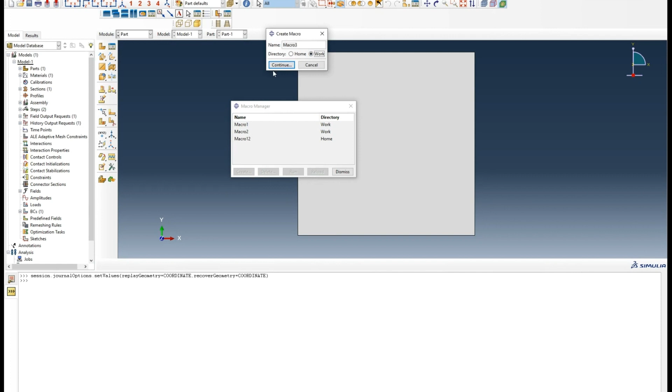So if I go to File, Macro Manager here, I can see that this window pops up. I can go create in my working directory. And this window starts up here. It says record macro, and there's a button to stop recording. So all this is going to do is record the Python commands necessary for me to do any action that I'm doing until I press stop record.

So let's go ahead and define, let's say, a new material. I'm going to go over here, define a density, and I'm going to give it some elastic constants, Poisson's ratio. So I define the material, and let's also create a section. Let's create a solid section with that material. Let's say material number 2. And then I'll stop the recording.

Once I stop the recording, I can go back to my folder structure, and I can look for a file named abaqusMacros.py, which is this file over here. This file will contain all of the macro commands I've written. You see I've written quite a few. The last one is the one I just recorded. So as you can see, it defines the macros in the form of functions. Each of them has some imports that are necessary for this to work. And then there are the commands that essentially correspond to the actions that I did ever since I started recording.

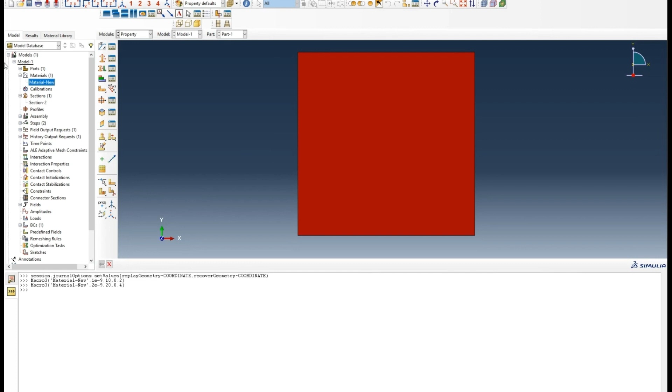But what I want you to keep from that is that Macro Manager is perhaps the most helpful way for you to get only the commands that you need to figure out, how do I get the commands that correspond to this action and this action and this action. So hopefully that makes sense.

You can use this, and as you get more proficient with it, you can start doing more and more actions with each recording and each macro, or you can customize it to specific actions that you want to perform. For example, whenever you open a file, you want to do some definitions every time, you can record those in a macro and just run that macro every time, or you can copy what's in that macro in your script.

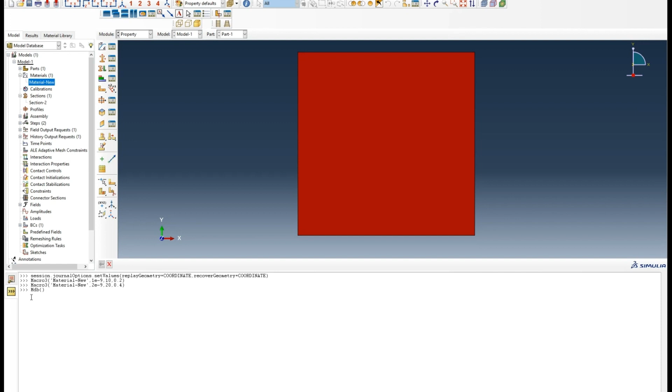So with that out of the way, let's clean up our model database. That's the command I just put here in the window, Mdb with an open parenthesis, cleans up the model database. It's equivalent to me going File, New Model Database with Standard/Explicit Model.

So what I'm going to do next in the remaining 10 minutes, we're not going to have the full time to do this, but what hopefully I'm going to do by showing you here is try to create a structure like this, where scripting will be extremely helpful. This structure is a perforated structure, so you can imagine this is a 2D square with an array of holes that we take a bunch of circles and we perform cuts in our rectangular sheet.

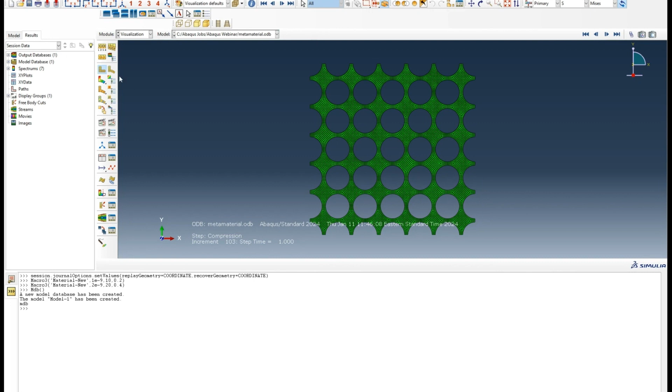And then what's interesting about this is that for certain cases, if we subject this thing to compression, we get a nonlinear buckling style behavior where the holes become ellipses and the orientation kind of alternates, as you can see here. There is a nonlinear force displacement relationship for a structure like this. But what's interesting about this is that this doesn't happen for any number of holes, any size of holes or ligament size.

The behavior of this structure is strongly dependent on how many holes you have, what's the width of those ligaments, how many holes you have in the X and Y direction and stuff like that. So it's an interesting exercise to consider this structure and be able to very quickly modify how many holes I have in the X direction, how many holes I have in the Y direction, run the simulation, set up everything I need to do, my steps, my sets, my boundary conditions, my material assignments, my mesh, everything. I want to be updated.

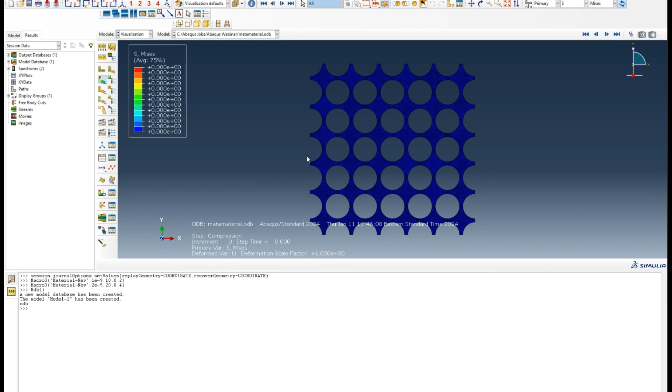I want everything to be updated at the same time, very, very quickly, without having to define the model from scratch. This is where scripting comes in handy. So this is what we're going to try and do right now. So there are many ways that one can go about this. I'm going to show you one, which I think is the easiest.

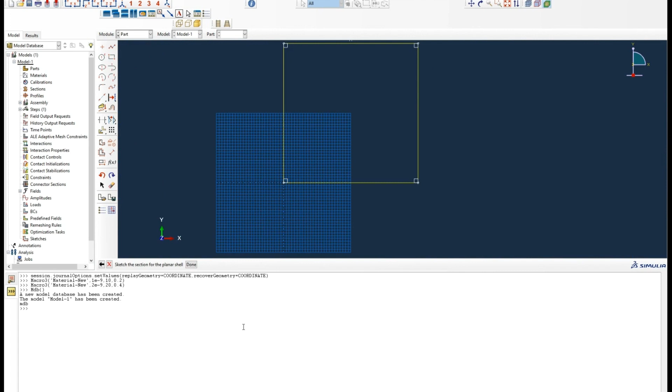I'm going to start with a 2D square over here. So I will do 2D shell, approximate size 1. I'll create a square at 0, 0, and 1, 1. So here's my square. Click done, and then I'll make a circle. Part 2, given that my square is size 1, I'll make my circle slightly smaller. Let's make it like this.

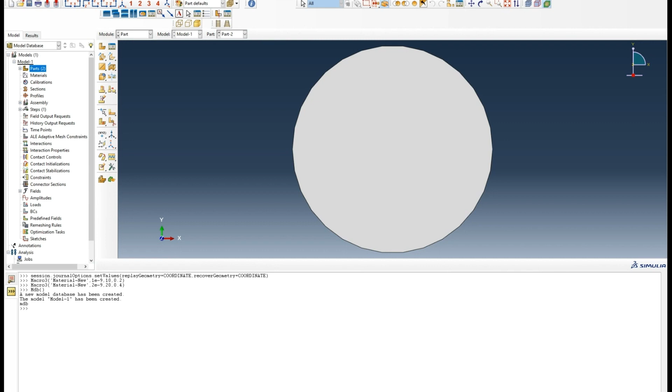And then what I can do is I'll go to the assembly and I'll create an instance of each. As you can see, my circle lies here in the corner. I'll make a couple more circles. I'll make another one and then another one. So I'm not creating new parts because I don't care about having different parts for different circles. I'm just creating different instances of the part. So as you can see, I have 3 circles over here. Let's move those a little bit, shall we?

Let's get the second one. I'll translate it by, let's say, 0.25. That looks good enough. And then I'll also translate this one by 0.25 in the vertical direction. And then what I'm going to do is I'm going to create a cut.

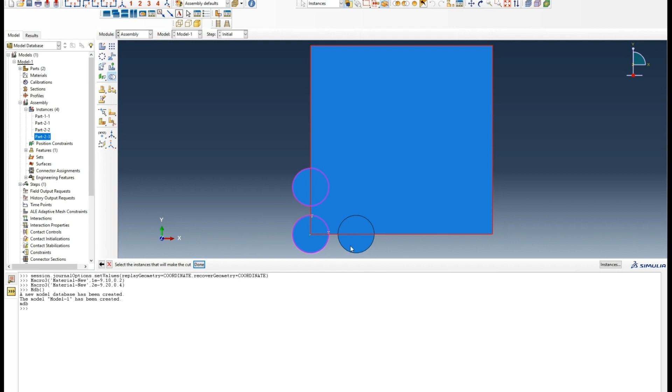So I created a cut here, cut operation, which says select the instance to be cut. So I want to cut the square, and the instances that will make the cut are the circles. So I do this, and as you can see, I'm slowly starting to create the structure that I showed you before with an arbitrary amount of circles in the X and Y direction. So I want to stop right here before I get too much in depth. And I want to see what the commands are that correspond to what I've done up until this point.

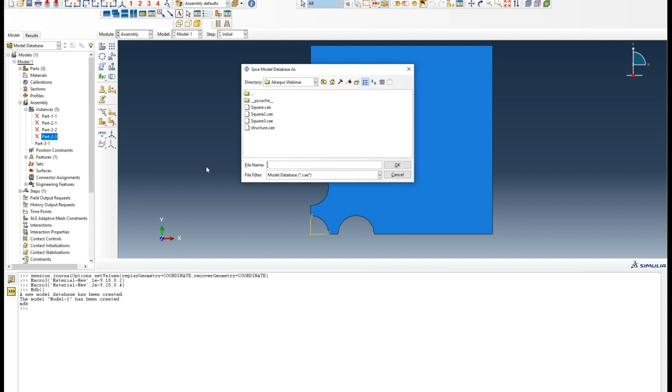So to do that, I'll save this as structure new here, and then I'll go back to my folder and try to find the structure new journal file. So I'll open this up and I'll save this as a Python file so that I can have the highlighting. And so there are some imports in the beginning, and then I have some commands that will do the actions I just did. So we started with a constrained sketch.

We created a rectangle using 2 points. The rectangle had dimensions of 1 in the width and 1 in the height. So one thing we can immediately do is parameterize the width and the height to be, let's say, still 1, but we can put those as parameters here. We can put the width and the height.

This command has to do with essentially creating the part and then associating the sketch for the square with that part to make actually the part a 2D part that I defined. And then Abaqus decides to delete that sketch. You can choose to keep that command or not. So this is what these commands are doing. They're creating the square. The remaining commands, the commands below this, are creating the circle.

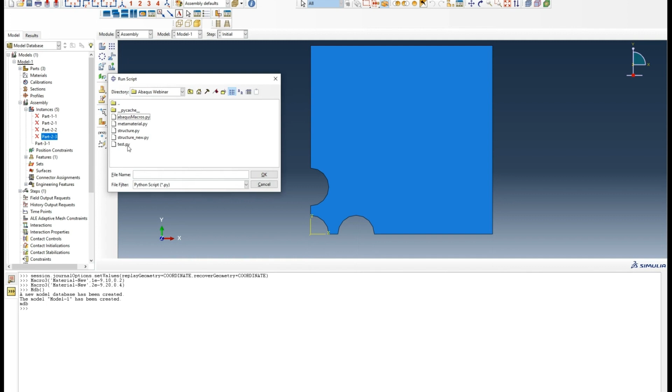So it created my square, it created the circle, and if I go in the assembly as I expected, I have 17 instances. Now, it doesn't look like I have 17 because 16 of the circles are in the same location. I haven't moved any of them yet. But this is going to give you an idea of essentially how I am starting to script my way through a model like this. Now, I've already done this exercise for you, and we will provide the script that does this by the end of next week.

And I want to run it a few times so that I can show you the beauty of everything I just said in the beginning, before we end this webinar and answer some questions. So I'm going to put break here, something to force my script to stop here before actually running a job and waiting for it to complete. I'm going to run this script over here. Metamaterial.py is the name. So I run it. It's doing a bunch of things and it's stopping with an error exactly where I forced it to stop. As you can see, it's creating this structure.

Let's open up our script again to see what it did. It used some X and Y, some width and some height, and it used a number of holes, and it used a certain radius for the hole. Let's change this to 5 in the X direction and 7 in the Y direction, and let's also make the hole a little smaller and run our script again to see if that's going to change. So I'm going to run our script again. As you can see, it created a totally different geometry.

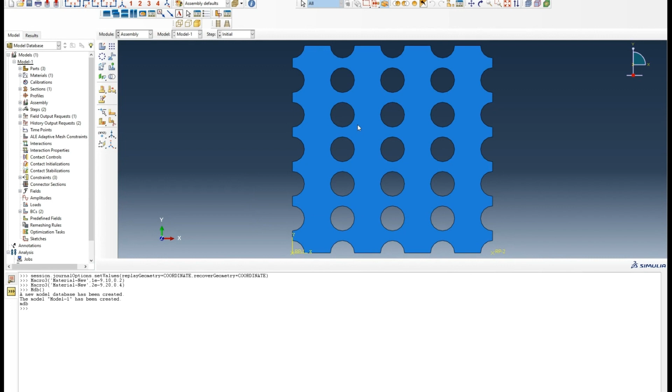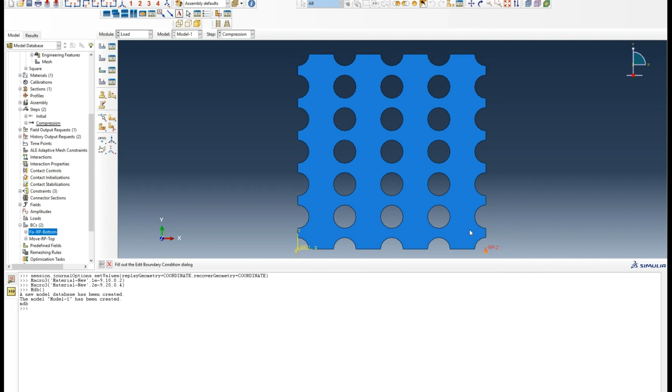What's nice about this though is because I made my script carefully as I was going through this, if I expand my part, you're going to see that we have sets defined, we have sections assigned. In the step, we have boundary conditions, fixing the bottom surfaces and the top surfaces of this ready to be compressed. As you can see, these sets and surfaces were automatically selected by our script. So this is all being taken care of automatically and very quickly, as you saw when I'm running my script. So this is the beauty of this. Every time I run my script, these things are happening automatically.

Now, this is a pretty long script. In 300 lines or so, however, I'm able to make this geometry fully parametrically for any number of holes, any width, any height. I can change my mesh settings. I can change how much I want to compress it. And even better yet, as you can see at the end, I haven't shown you this, but it's part of my script. It's actually running the job and waiting for the job to complete.

And after that, it's opening the output database and it's extracting the force versus displacement relationship for me. So I've already done this in the background for you, and you can see that it's creating a file, force versus displacement dot txt, which if I open it, you're going to see that it has force versus displacement information in here that corresponds to the file I just ran.

So this is what you can expect by making a script that creates the geometry, runs a job, and does some post-processing as well. And as I said, we will provide this script to you so that you can either study it at your own time or use it to make something that's more appropriate to your workflow. We will also provide course notes with the conclusion of this webinar that go far more in depth than what I had time to cover in those 15 minutes for you today.

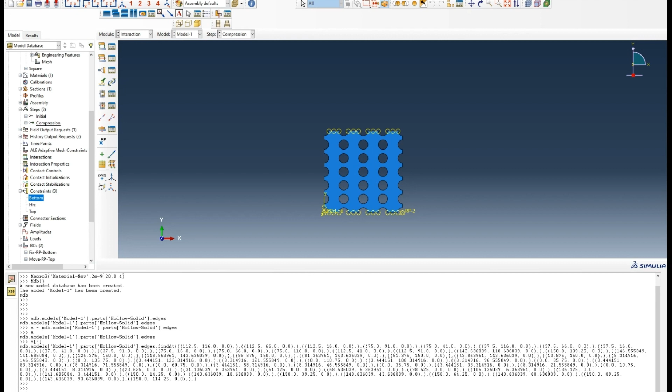Now, the reason I like this particular command and why I think it's very helpful is that if you have a geometry like this, oftentimes you need to do some pen and paper calculations to find what are the coordinates of this point on this circle. Obviously, you can figure it out, right? It's not super difficult to find the coordinates of a point on a circle. But this way, if you only care about figuring out where an edge is in space, Abaqus has that built in.

You just go to the corresponding edge, if you know what that is, edge number 0 or edge number 10, and you do point on, and it's automatically spitting out a random point on that edge, which is very helpful. So this is a way with the tab that I like to essentially explore what's available on the API in here.

Another way, obviously, would be through the documentation, but that can be a little bit more advanced because it might be a lot if you're just getting started with Python scripting. The resources for Python scripting might be too much for you to make sense of, but it's always a good resource to keep in mind.

So there's a question here that says how to extract output file. So I didn't cover this in detail as part of this intro webinar. But very quickly, how did I get these commands? You can get them one of two ways. You can use the macro manager that I just showed you earlier.

So I can go ahead and do macro manager create, and I'm recording. Now I'm going to open an ODB file. Let's say I'm going to open this one, and what I want to do is extract the strain energy and save that to a file. So I'm going to go here, save the strain energy as is, and then I'm going to do report XY.

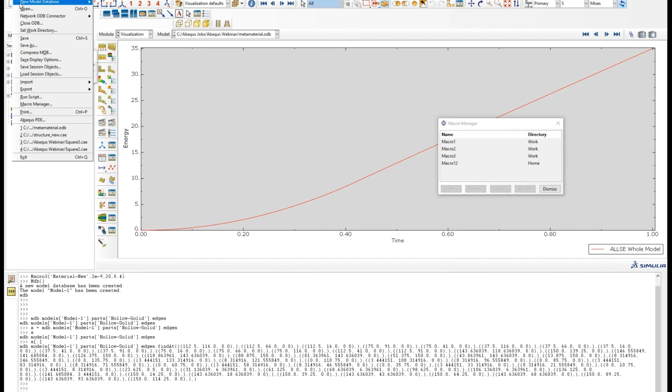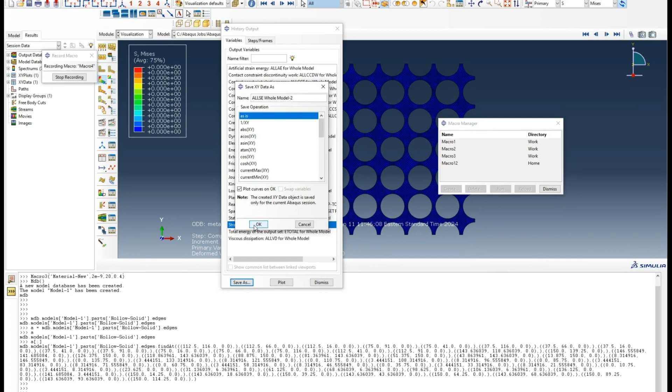This window opens up. Sorry. Oh, okay, it saved it like this. So then I'm going to, oh, I didn't even record it. So let's do it again. Open the ODB, and then export the strain energy, which I had and I just lost it. There you go. Strain energy, save it, report XY.

abaqus.rpt. Stop recording. It had a problem with macros, but it still wrote macro number 4. If you recall, we were at macro number 3. It's still outputting commands over here, and I can use the same logic to go through them, clean them up, and do with them whatever I need to do.

That's one way. Another way is, if you look at the commands I had in this file that I'm going to share with everybody, the good thing about history output is that it's already in your ODB. So the only thing you have to do is navigate to it and extract that information. I already had a reference point for which I requested history output. So I navigated to the proper step; this root assembly node 1 is the reference point I had selected, and I requested the displacement and the reaction force.

And then I converted the output to a friendlier format to export in a TXT using NumPy. So if I go back to that folder, you see the way I exported things with Abaqus was in this form. It has a header. That's one way to export things. The other way that I'm doing it is more convenient for me, but might not be for you. It contains only the information that I need: X for displacement, Y for force in this case, and that's it.

So in short, to answer that question again, you can use everything we showed up to this point to figure out how to do post processing. So the macro manager still works.